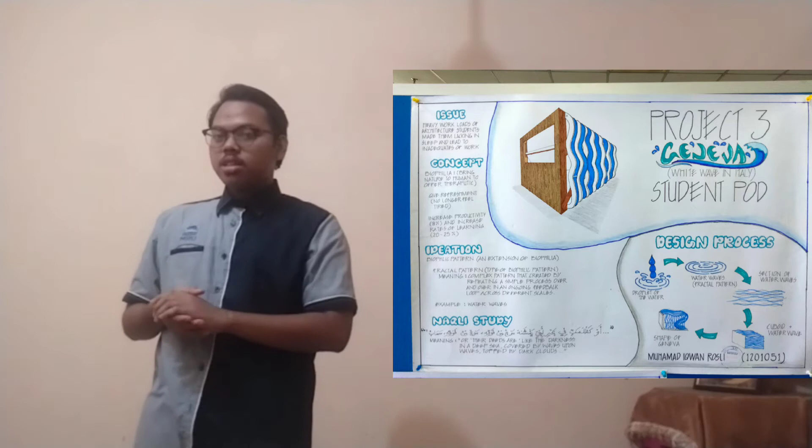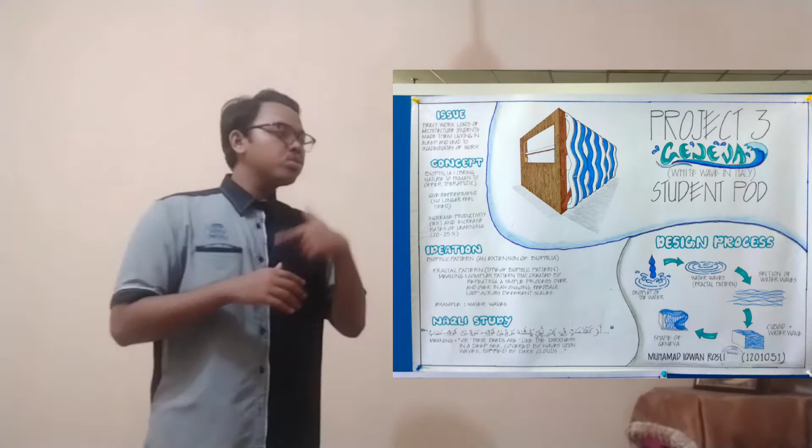What is the relation between the concept and my issues? Essentially, my issues are all about space, privacy, and the surrounding that influences us as architecture students to do our work, sketch, draw, and design. The surrounding will trigger our mind—if we have a boring or lame surrounding, it will not trigger our mind to generate the best idea.

So this concept will obviously give the best solution when we bring nature into our surrounding. Our mind will become at peace and can generate creativity and critical thinking, producing the best product.

Besides, the biophilia concept can give refreshment to our mind, so we will no longer feel tired. When we feel tired, we cannot think correctly or logically. What is best for the design? The product of critical thinking cannot be done with our tired mind. So that's why I choose this concept.

This concept also can increase productivity by up to 8%. When we have a lot of energy, we can produce a lot of great ideas, a lot of the best products. Without energy in our mind, we cannot think better.

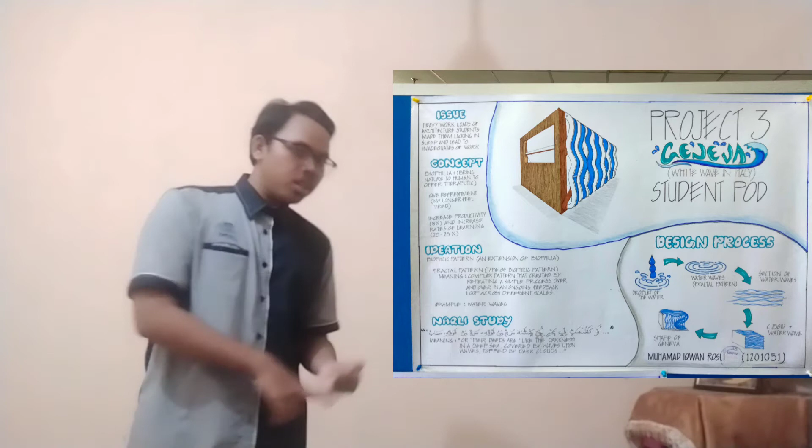The concept also can increase the rate of learning from 20 to 25%. Can you imagine that? With this simple concept, it can increase productivity and the rate of learning. That's so amazing. That's why I try to trigger our mind in relation to bringing nature close to us, so we can get a better idea and produce a good design.

So the conclusion of the concept, I've got the ideation. The ideation is biophilia pattern. Biophilia pattern is an extension of the biophilia concept. Biophilia pattern has two types, but I only choose one, which is the fractal pattern. What is a fractal pattern? It means a complex pattern that is created by repeating over and over in an ongoing feedback loop across different scales.

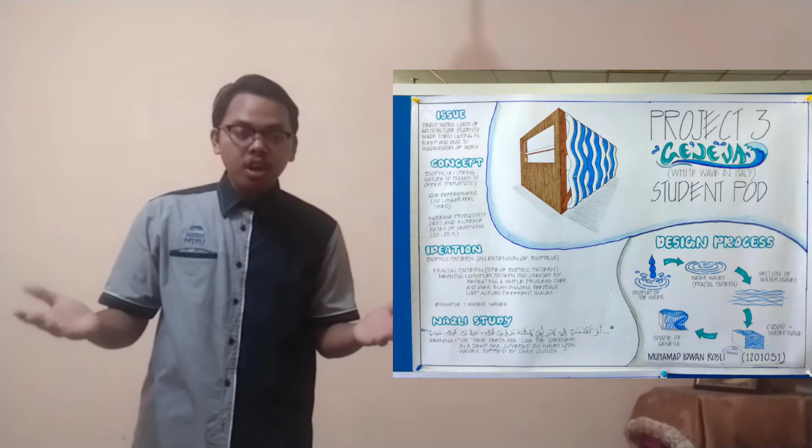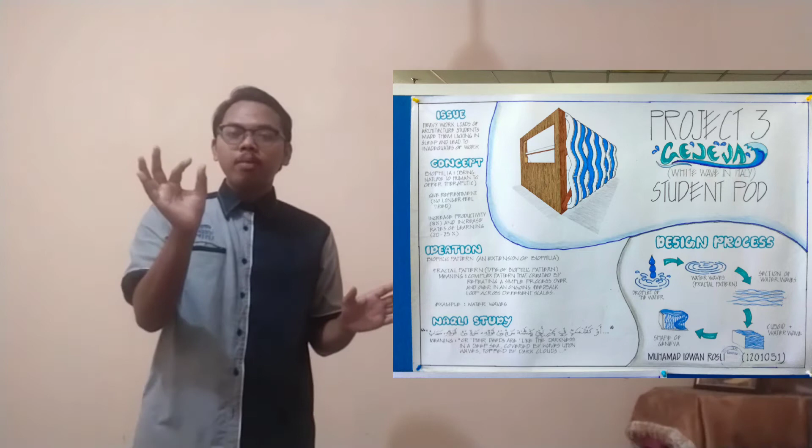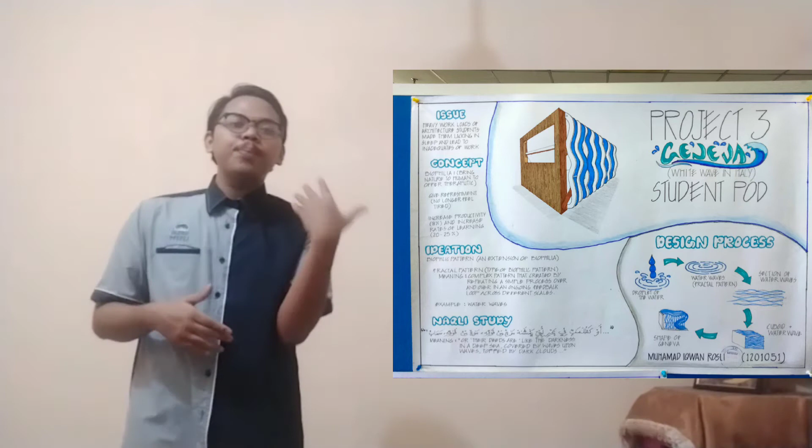I'll give you a simple analogy to describe the concept of fractal pattern. A droplet of water falling onto the surface of water will produce water waves. What is the form of these waves? It's a circle, right? From a small circle it will grow into a big circle. The process of growing from a small circle into a big circle, that's what we call fractal pattern. From this pattern, I will interpret it into my design as a solution for my issues. It's great, isn't it?

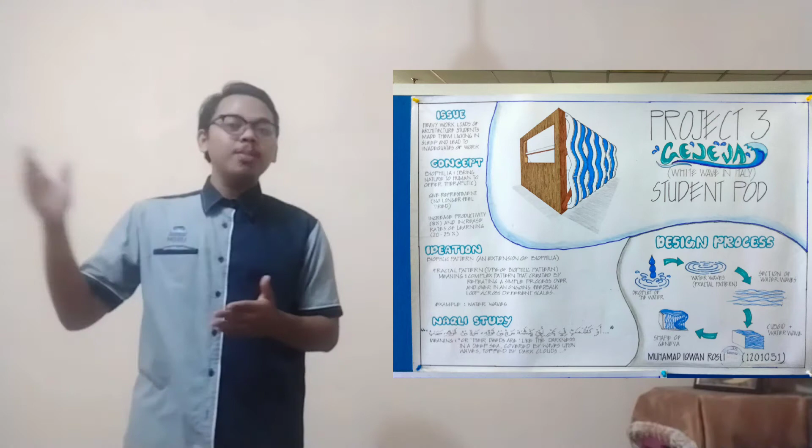From nature, we can design something, we can interpret something with the good feedback that we got. It really gives us a good advantage. That's why I came up with the biophilia concept and fractal pattern ideation.

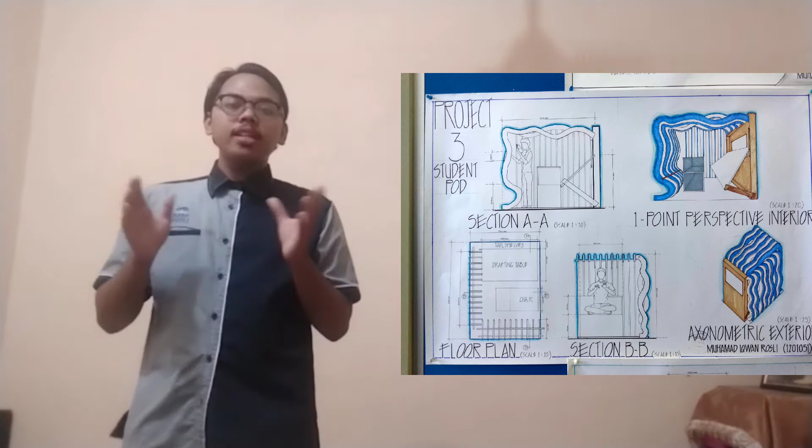From the ideation that I've got just now, I tried to relate it with the Naqli study in the Quran, which is the great book of Allah, so my design will become more meaningful. If I combine the concept, the issues, and the Naqli study, then I will get my great design. So I decided to refer to Surah An-Nur, verse 40, as my Naqli study.

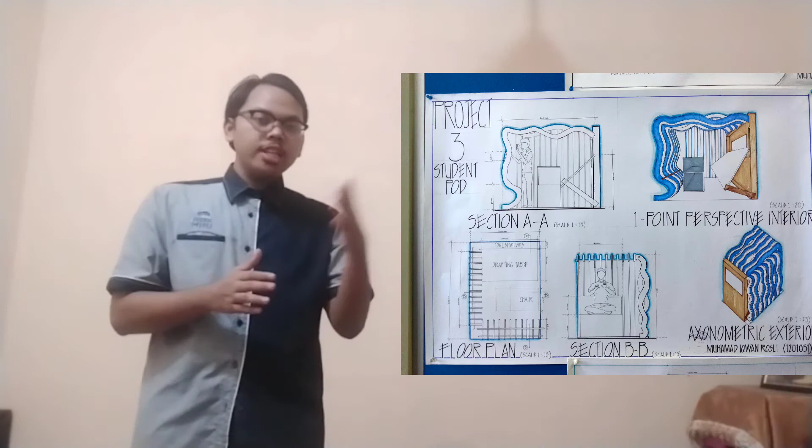In this verse, Allah actually explained or described human behavior. He made an analogy for human behavior, like nature, referring to darkness in a deep ocean covered by waves and waves upon waves. So that's related, human and nature.

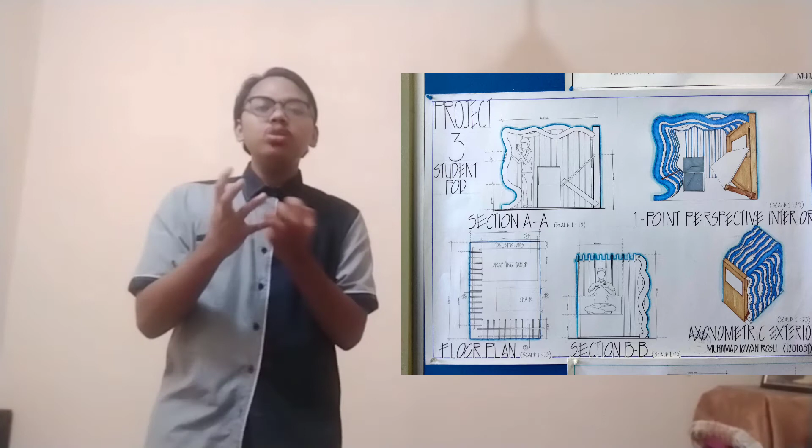That's why I chose the concept of biophilia. The relationship between this ayah, this verse, and my concept of biophilia is that I try to bring nature close to human, as Allah Himself makes an analogy to show humans that our own behavior is like nature. Even though in this ayah nature is referred to as a bad attitude or bad deeds of humans, still human and nature were close. Human and nature are related to each other.

So when we talk about my issues, it's all about the privacy, the space, and the important thing is the surrounding, because our surrounding will influence us. So what is the good surrounding that can influence us as an architecture student to generate good ideas, critical thinking and creative products? It is nature.

When Allah said human behavior is like the darkness of the sea covered by waves, upon the waves, even though it's a negative thing, when we look at it in a positive way, we can say that we as humans are related to nature.

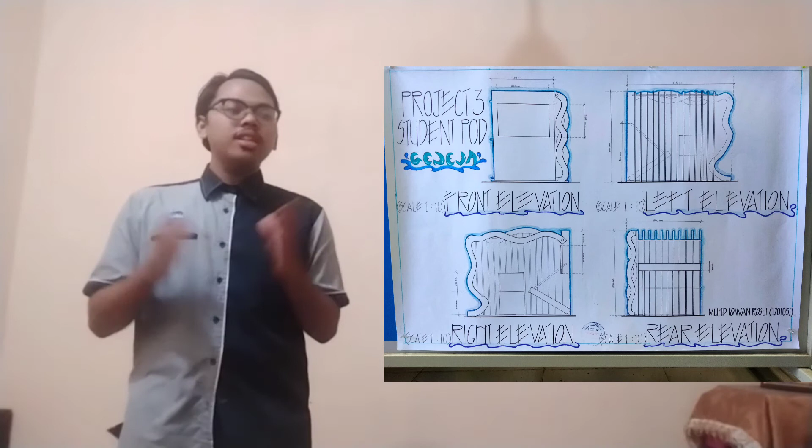As Allah himself made an analogy that relates human and nature, that's why I bring up this concept, so it becomes close to us as humans. That's how I relate the issues, the concept, and the Naqli study, and from those three, I got my design.

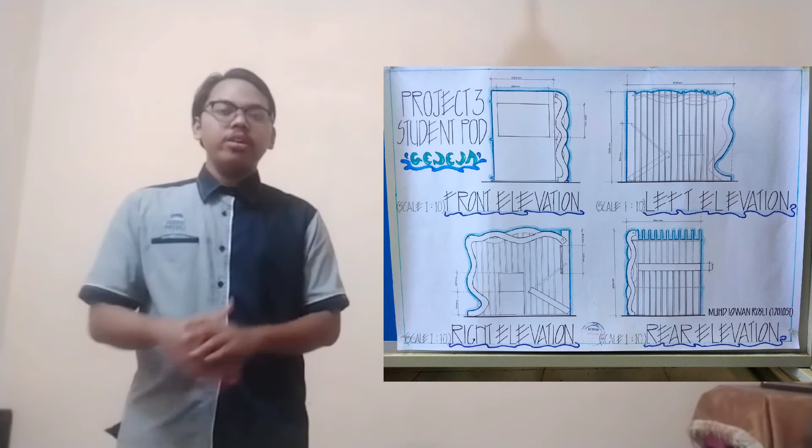My design's ideation was based on the droplets of water that fall into the surface of water, producing a water wave. From the process of the water wave, it comes from a small form of circle, growing into a big form of circle. Then I cut it into a section, and it becomes an extraordinary shape, which is a wavy shape.

A wavy shape is not an ordinary shape because it comes from nature. It's not a boring shape, it's not a geometrical shape. So the wavy shape is really close to us, as that shape comes from nature.

From that wavy shape, I tried to put it into a cuboid of 1.2 by 2 meters. I tried to interpret it into the cuboid side of the student pod, then I cut it, fixed it, changed it, until it became my design.

As you can see, the form of my design is a wave shape. The right side and the back side are fully covered, and the upper side is fully covered by wavy shapes.